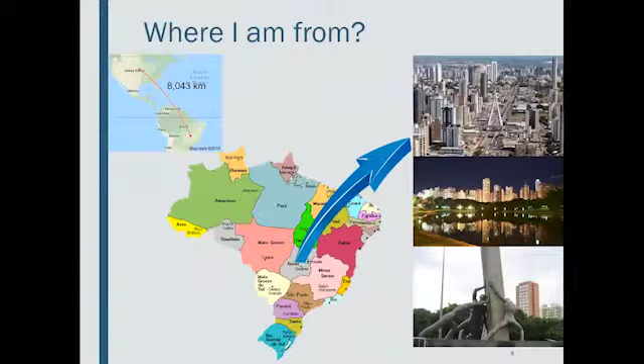In 2013, we had two important improvements in our infrastructure: the inauguration of the asphalt materials and mixtures lab, with financial support from Petrobras, and the Technological Innovation Construction Lab, with financial support from FINEP. Recently we got approval to start the PhD level in our program next year, and we are interested in partnerships with other universities. We want to start an academic network with the University of Nebraska, and the Federal Universities of Goiás, Espírito Santo, and Rio de Janeiro.

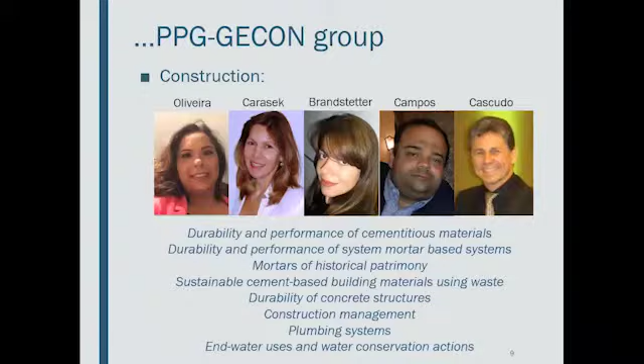In structural engineering, we have 5 professors working with structural concrete, steel fiber reinforced concrete, computational modeling, structural dynamics, and optimization. In construction, we also have 5 professors working with durability and performance of cementitious materials, mortar-based systems, waste and sustainable materials, durability of concrete structures, construction management, plumbing systems, and water use.

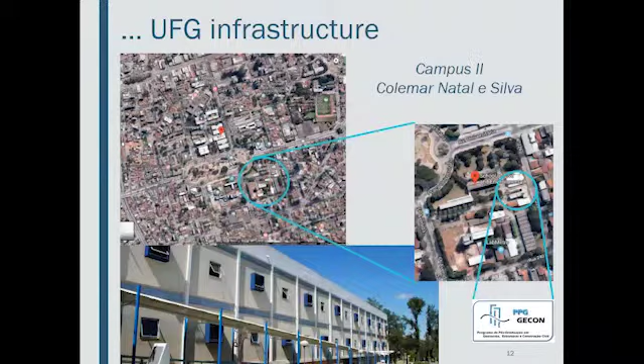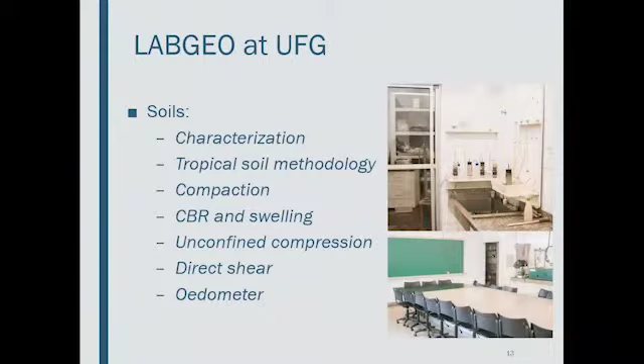There we have 2 important labs. One is the geotechnical laboratory, divided into 3 areas: the soil area, where we perform tests for soil characterization, tropical soils, compaction, CBR swelling, unconfined compression, direct shear, and compressibility tests; an area for unsaturated soils, where we study suction and other parameters with suction control; and the area for materials and mixtures characterization, where we test aggregates and bitumen, and work with Marshall and Superpave mix design. We also have a UTM machine where we perform resilient modulus, IDT, dynamic modulus, flow number, and fatigue tests.

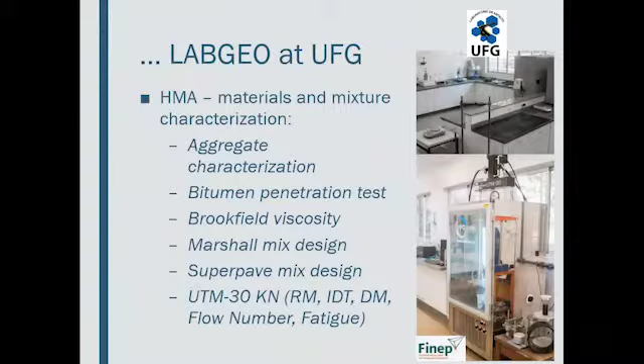There are some equipment for field tests that you can use to evaluate the performance of pavement structures in roads and highways, such as compaction control, dynamic cone penetrometer, Benkelman beam, sand patch, British pendulum, and also to take a specimen core from the field.

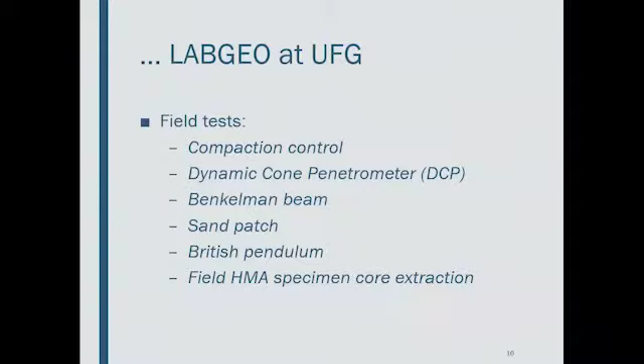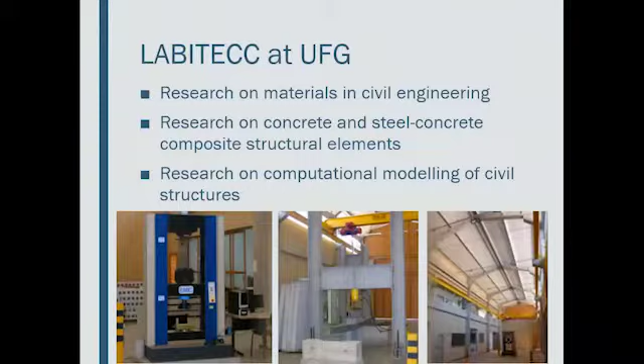Now we are working on the rheometer acquisition with financial support of state and federal agencies, and also on the SCB test implementation. This is the other lab we have for studies applying materials in civil engineering such as concrete and steel concrete, and we also have a room for computational modeling of civil structures.

When necessary, we work with other labs - for example, X-ray diffraction and scanning electronic microscopy can be performed at CRTI at UFG or Furnas. And when we have to work with the rheometer or binder aging, we go to the University of Brasilia.

Since I started to work there, we have been studying non-conventional materials for base and sub-base, such as clay laterite soils, greywacke, construction demolition waste, phosphogypsum, and soil stabilization. And recently we started to work with asphalt mixtures through laboratory and field analysis of cold-in-place recycling and HMA mix design and performance evaluation.

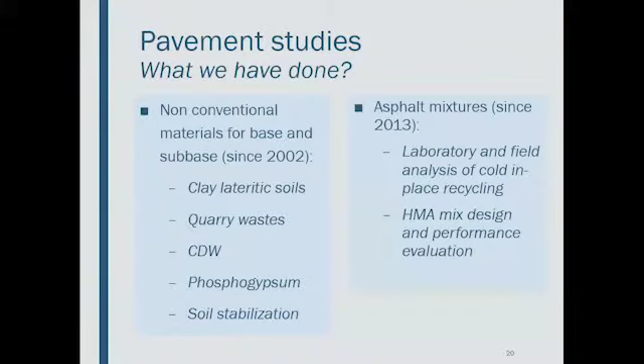So you are interested in a partnership with University of Nebraska. Maybe what you do with non-conventional materials can be applied to new materials and techniques that the group works with here. We also want to improve our studies in HMA by applying FEM, SEM, and using multiscale laboratory tests.

Now I would like to show briefly one of the main projects we have there. This project started about 12 years ago with the financial support of state and federal agencies, and also the company that produced this material.

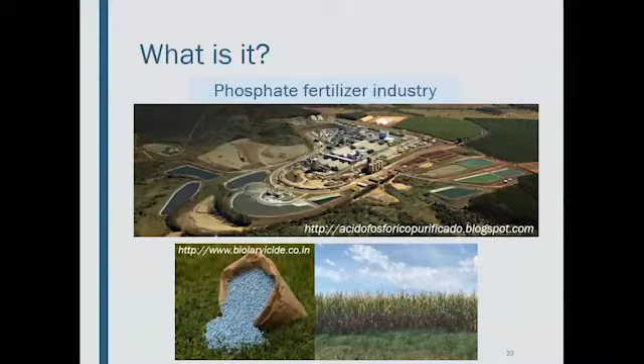So what is phosphogypsum? It's a product that you can find in the phosphate fertilizer industry, because this kind of company wants to produce fertilizer for use in agriculture. But during this process, we have the exploitation of the phosphate rock and the addition of sulfuric acid to get the phosphoric acid necessary to produce the fertilizer.

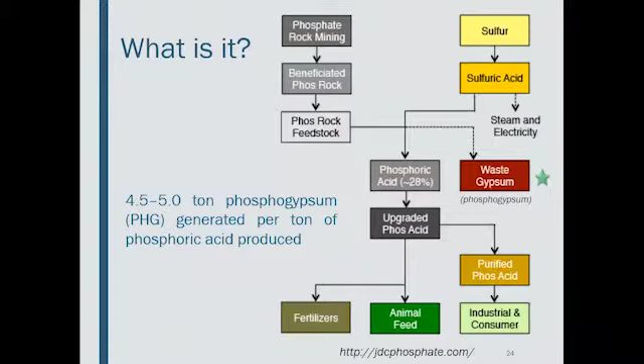But in this phase, we also have the production of a waste that we call phosphogypsum. The problem is that for each ton of phosphoric acid produced, we have about 5 tons of phosphogypsum generated, and this material is laid up in open piles or stacks. It occurs in Brazil, in Goiás, and also here, for example, in Florida.

There can be some problems about this kind of disposal related to environmental concerns. For example, in Florida the numbers show about 1 billion tons stacked in 24 piles, and 30 million new tons are generated each year.

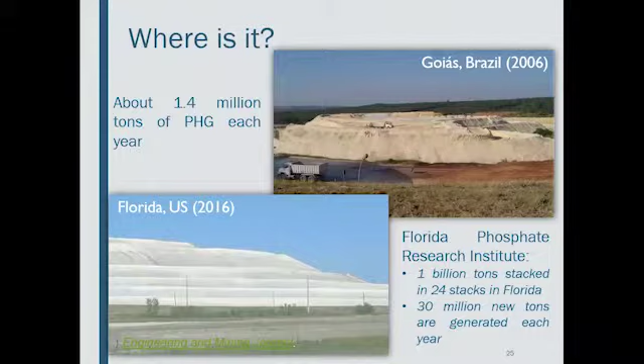Then you can think about how to use this material. You can use this material for engineering purposes, but you have to take care about the environmental risks because of the impurities that can appear depending on the origin rock and the process of beneficiation that happens in the industry.

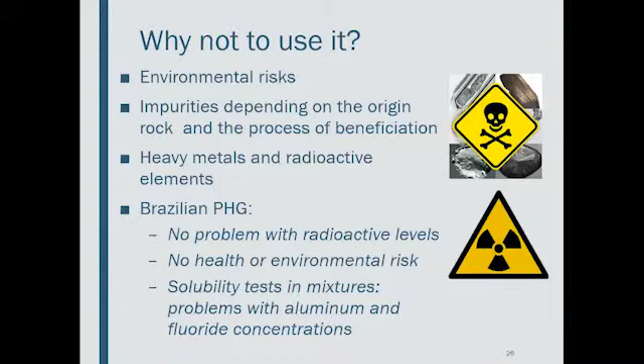So you can find heavy metals and radioactive elements in this material. In the case of Brazilian phosphogypsum, we observed no problem with radioactive levels and no health or environmental risk, but some solubility tests showed problems with aluminum and fluoride concentrations.

Then we started to study this material in 2006. We thought about using phosphogypsum to stabilize soils. So the phosphogypsum we have there is the dihydrate type, and the soil we have most abundant is clay tropical soil.

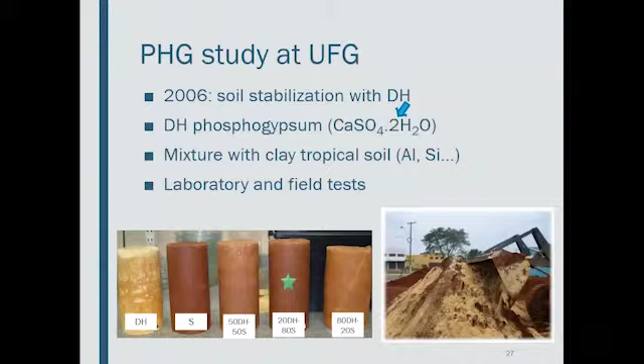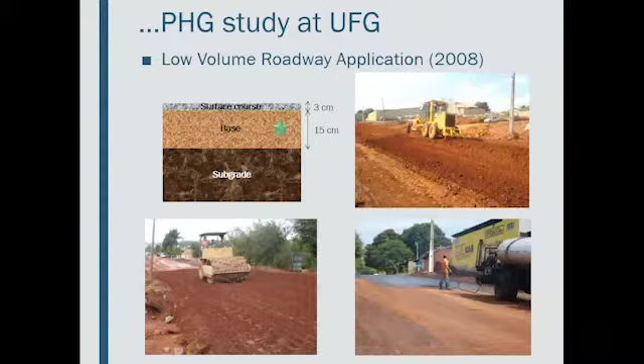Then we performed lab and field tests. By lab, we found a dosage that is a good start to get better mechanical behavior, and we used this mixture to construct a low volume road, using it in the base. Since this construction, we have been monitoring this pavement with field tests.

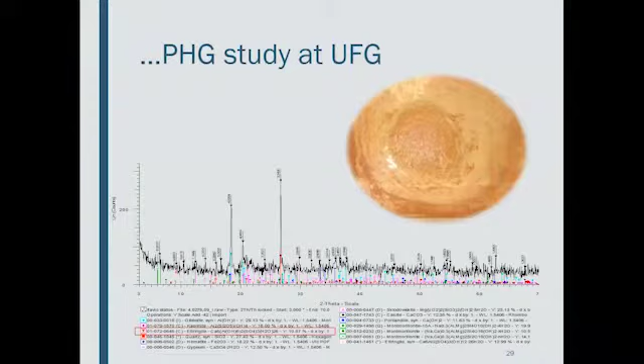In the next phase of this study, we think about transforming the dihydrate phosphogypsum by a thermal treatment into the hemi-hydrated type, trying to solve this problem about the swelling. Then we also add cement and lime, trying to improve the mechanical behavior.

The main results of this work are presented in this paper, and I will summarize briefly. We worked with 10 samples of soil mixed with lime, and 8 other mixtures where you change the type of phosphogypsum, sometimes with soil and sometimes without. Then we performed lab tests: characterization, compaction, mechanical tests, and to complement the results, X-ray diffraction and scanning electronic microscope tests.

These are results for swelling tests, following a Brazilian specification where we put the sample in contact with water during a period and observe the volumetric strain. These results showed that mixtures with the DH type have high values for volumetric strain, but for mixtures with hemihydrate type of phosphogypsum, you have low values. So it's a good result, showing that the transformation of the DH into the HH can work.

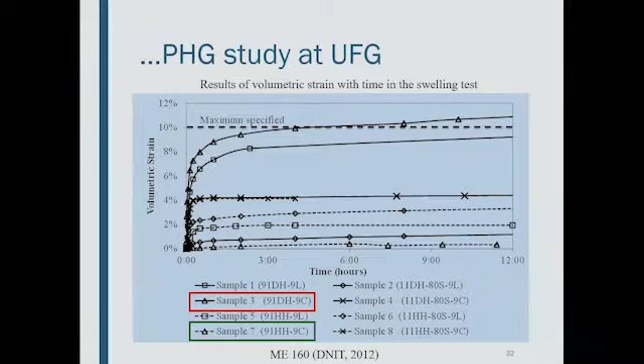This is a result for unconfined compression tests, and you can see that these mixtures with HH present good results. When I have the dihydrate type, maybe with the soil, you can get some good values for the strength too.

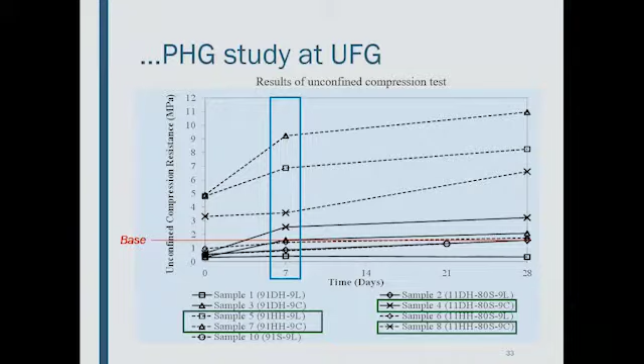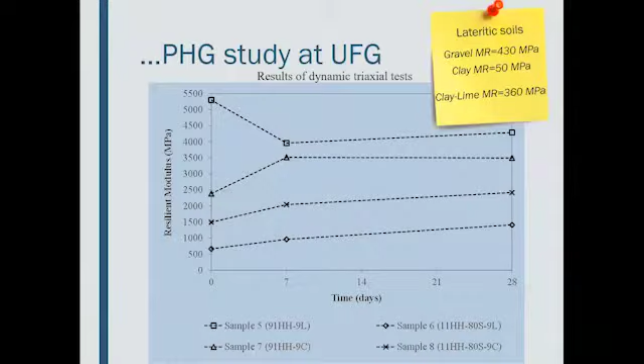About the resilient modulus, we got good values for the mixtures with the hemihydrate type. These values are higher than those observed for traditional materials used for subbase and base of flexible pavements. So by mechanical tests, these results show that it's possible to use these mixtures.

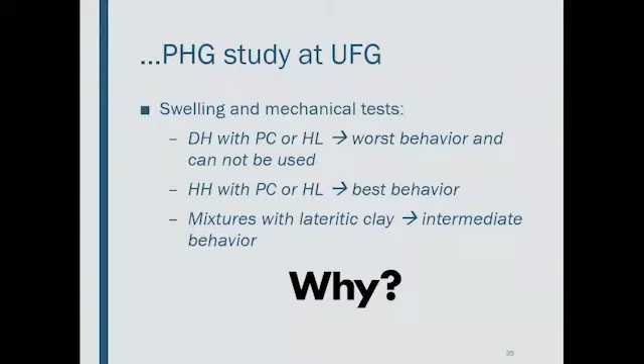With the swelling and mechanical tests, the dihydrate type presents the worst behavior, maybe not good to use for this purpose. But when transformed into the hemihydrate type, you get the best behavior. Mixtures of this material with lateritic clay presented intermediate behavior. But for now, we cannot explain why this difference of behavior occurs. For this, it's important to look at X-ray tests and SEM images.

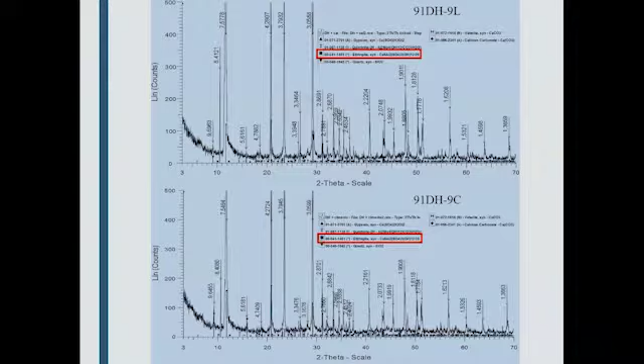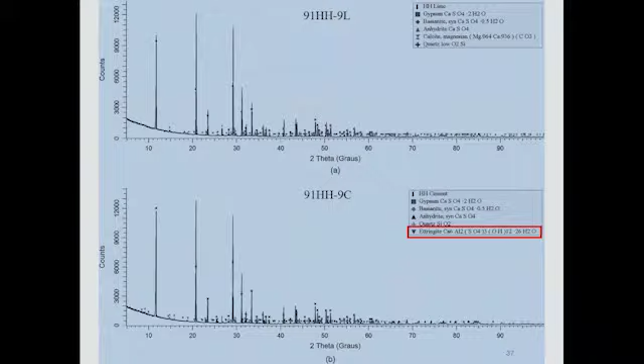By the X-ray tests, we observed that in the DH mixtures, we still have ettringite, which we don't want. But when we use the hemihydrate type, we observe ettringite only in the mixture with cement. For the mixture with lime, we didn't note it.

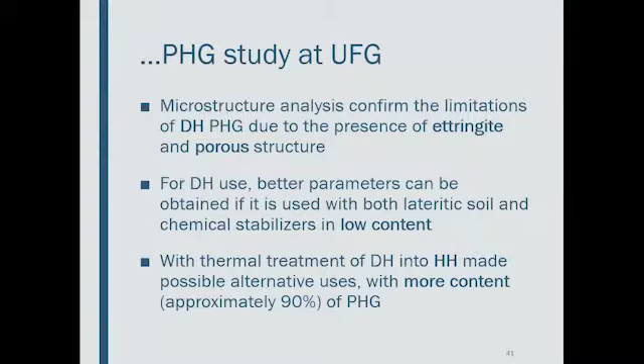With this study, we conclude that the DH type presents limitations because of the presence of ettringite and porous structure. DH maybe can be used if combined with lateritic soil and a stabilizer, but in low content. The thermal treatment works; we got better results using the hemihydrate type of phosphogypsum. With this material, you can think about using more of this byproduct, which is a good point.

This year we had another paper related to this topic, but the focus here is to apply this material for embankments. We present results of shear tests and compressibility tests, and we are also in the process of re-review of this paper for the Resource Conservation and Recycling Journal.

We think there are many things you can do in this area, for example, studies performing SCB tests with this material. We're talking about starting something in this way next year, but maybe using this material for hot mix asphalt and also in geopolymers.

And now I want to show the main results that we observed in the study that I start here with Dr. King's group.

First, I think it's interesting to present why I decided to come here. I met Dr. King for the first time at a conference in Brazil, in the south of Brazil, Cataratas. It's a beautiful place to visit.

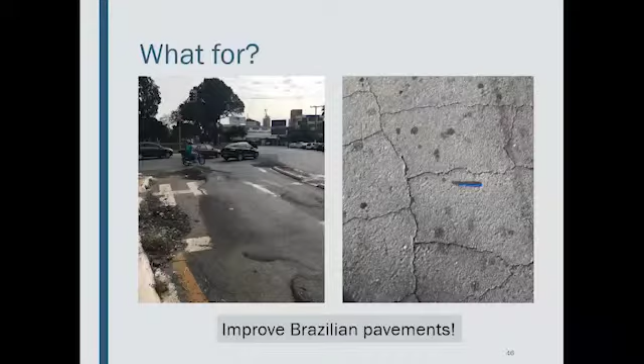Why do I want to study hot mix asphalt? It's because, unfortunately, in my city, I see this every day - several problems with rutting and cracking. So I think it's important to improve our pavements.

In terms of fatigue, we can work in the lab using many scales, trying to predict what will happen in the field. It's common to work at the binder scale by performing tests in the rheometer, or doing tests at more real scales with asphalt concrete samples.

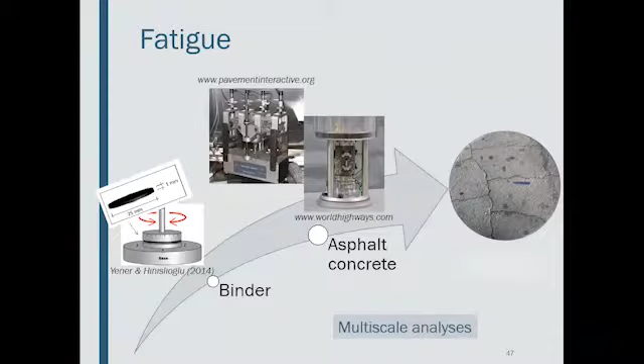But when we see the results for the binder test, we can note some problems because of the difference that exists between the film thickness in this test and the real film thickness that exists in the asphalt concrete. And at the other scale, you have good results, but it's time consuming, it's hard to get the samples, and the analysis can be complex.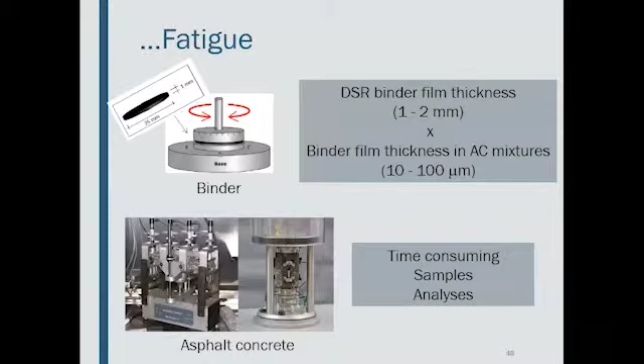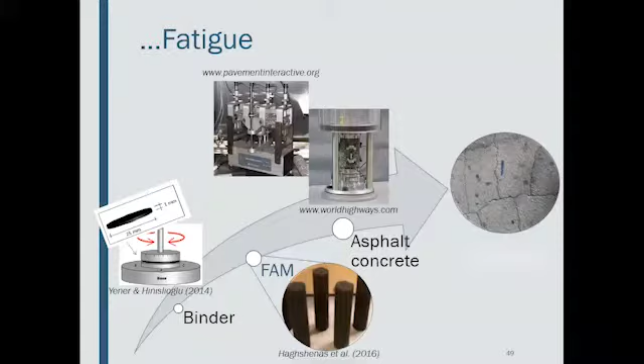Then we can try to work at an intermediate scale. Many studies have shown that it's possible to work with this to predict mechanical behavior. We can work with the rheometer to get the complex modulus and the phase angle with less time, good repeatability, and using cylindrical samples.

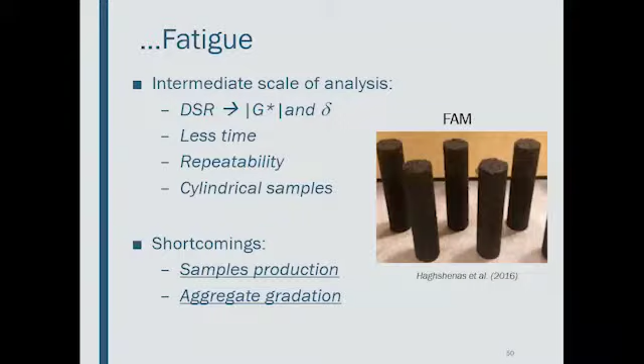However, there are some shortcomings. For example, regarding sample production, it's sometimes not easy to get the samples from the asphalt concrete. Also, the fine aggregate used in these mixtures will impact the results, so it can change depending on the mixture you're working with.

Then we think about how to get better fatigue parameters for asphalt binders. With this experience of the FAM, we are trying to use the rheometer and cylindrical samples, but work with sand asphalt mortar.

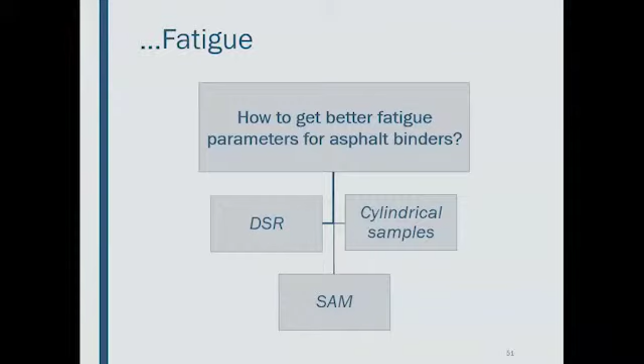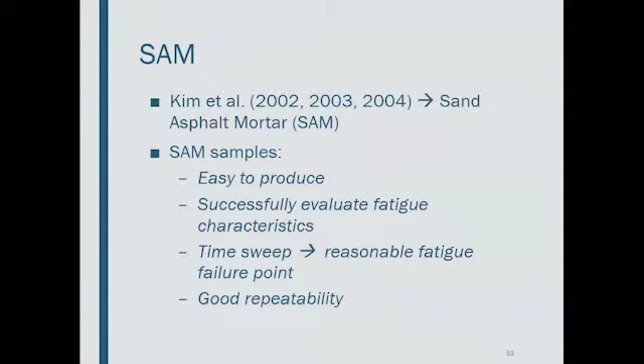There are some papers that present results of these studies. These papers show that SAM samples are easy to produce and successfully evaluate fatigue characteristics. Time sweep tests presented reasonable fatigue failure points with good repeatability.

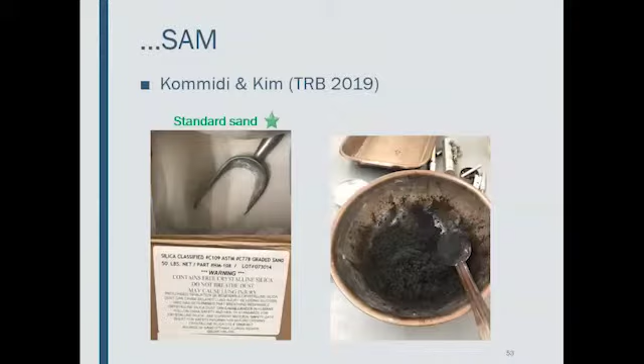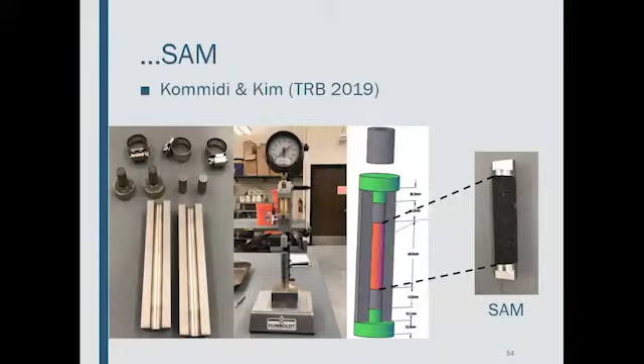Based on the methodology that will be presented by Santosh and Dr. Kim next, we decided to work with a standard sand that you can find everywhere, mixed with the binder you want to study, and put into a special mold, compacting it with a penetrometer at a fixed energy. After this process, you can open the mold and get the sample.

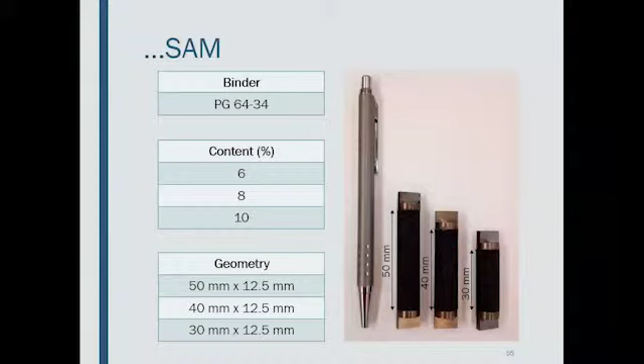In this period, we worked with one binder type, the PG64-34. We varied the binder content at 6, 8, and 10%, and the geometry in terms of height at 50, 40, and 30 millimeters. We performed tests on the rheometer, interested in finding the relation between complex modulus, phase angle, and strain.

So we performed strain sweep tests where the frequency was fixed at 10 Hertz, and the percentage of strain varied across a range. We also varied the temperature for the tests at 10, 25, and 45 degrees Celsius.

For each configuration, we worked with at least 4 tests, trying to check the repeatability of this methodology. We also tried to figure out the film thickness using two procedures: estimation by equations, and images with the laser scanning microscope.

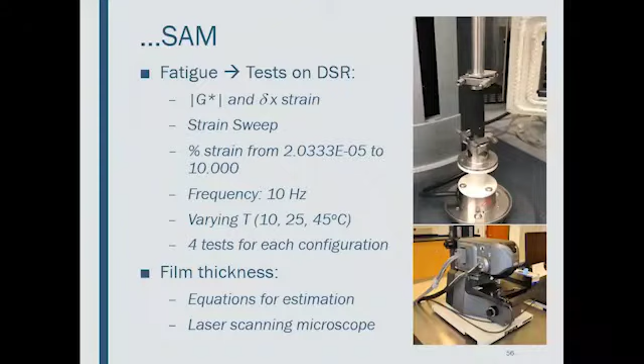This is an example of the results that you get. This is for 8% dosage at 3 temperatures and also the 3 geometries. So you can see the relation between the parameters: complex modulus, phase angle, and strain.

We can see the failure point in all tests, and you can also see the influence of temperature, because depending on the temperature, we got different shapes for these curves. We just finished this test, but now we will start to analyze the results.

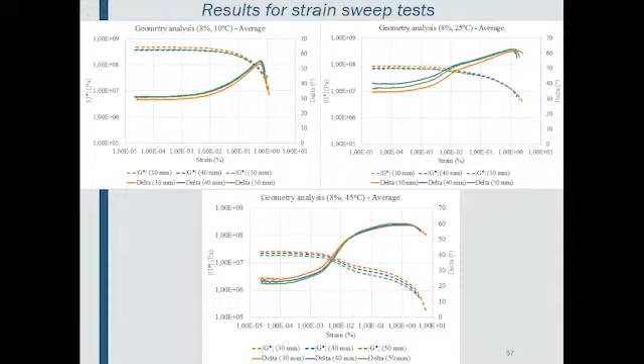We think about getting these 5 points for each curve: the initial complex modulus, the strain where the behavior changes in the curve, the initial phase angle, the phase angle at failure, and the strain at failure.

So the plan is to check the variability of these parameters for each situation - temperature, geometry, and binder content - to figure out if we are having good repeatability with these tests.

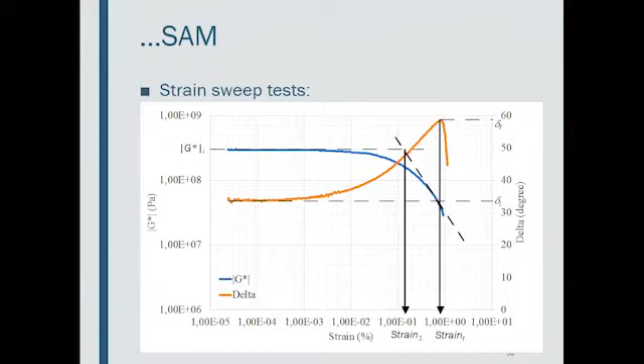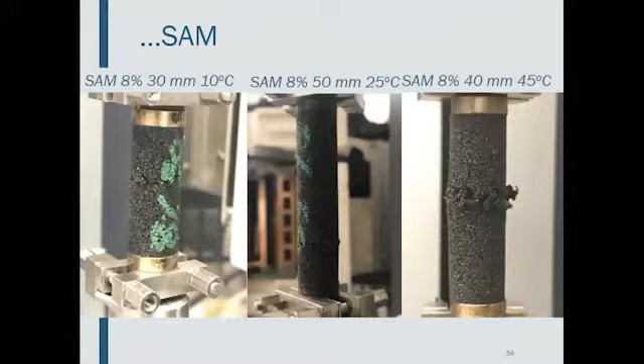These are some examples of the failure because of the test, which we get in the samples. Sometimes we see the failure with cracks in the middle. Most of the time it's in the middle of the samples, but sometimes you can see it close to the bottom or even close to the top of the sample.

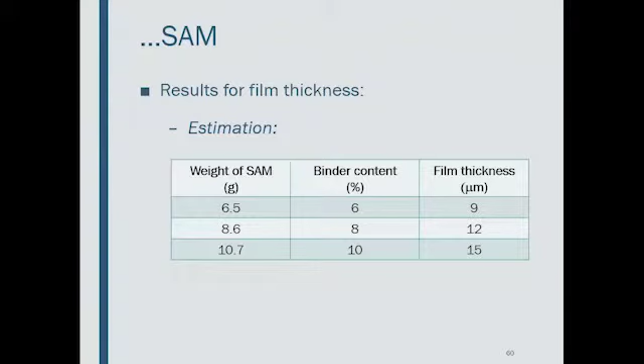And about the film thickness, this is the results for the estimation. We believe we are in this range, about 9 and 15 micrometers, and we suppose that with this we are close to the real value in the field.

So we will finish this analysis. We will prepare a paper with these results. I will come back next week to Brazil, and I want to replicate this methodology there using the same sand and the same test, but with another binder, the binder that you have there. And we can do other tests in the rheometer, and future work with just asphalt binder, continuing this study there.